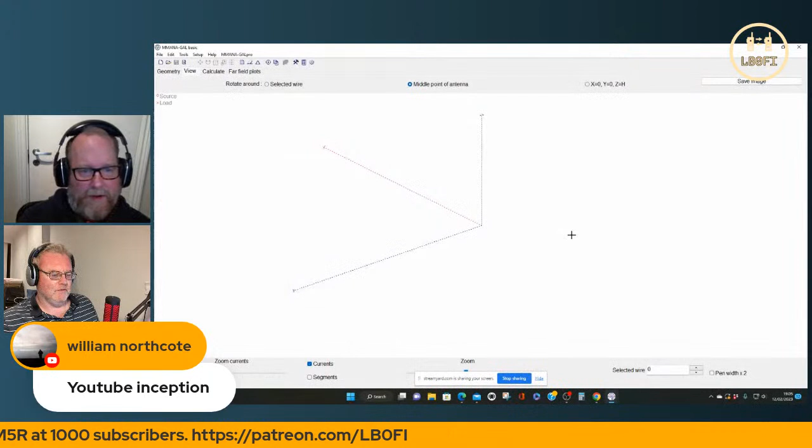Now, what can you see? Now I can see the two of us there, I think. We're good now. Right, we're getting there. Right, let's go. I think we're pretty much. There we are.

We're pretty much at the right place now. Good stuff. So let's say I wanted to draw a very simple vertical.

We'll do a dipole actually. So with MMANA, when you open it up, you get to this tab, and you've got lots of stuff. But let's say we just wanted to draw and go for it and just see what happens.

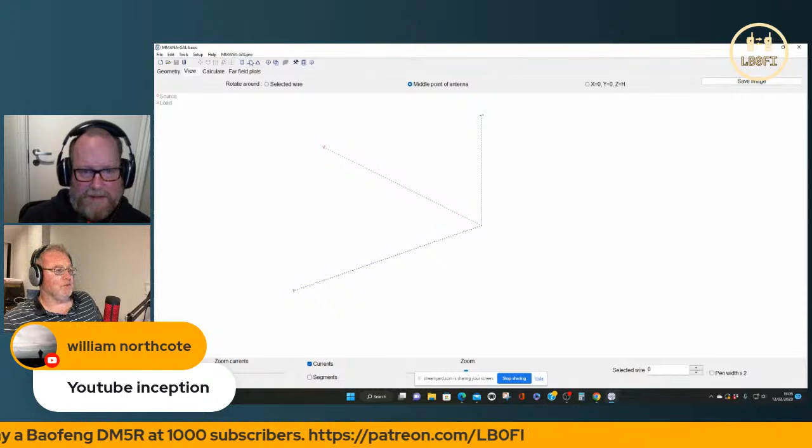So if I go to the top here, you've got the wire edit button, towards the top here. When you click on that, you go to YZ, and then what you've got is like a blue thing, Z-axis and Y-axis. In effect, that's how your system will be set up.

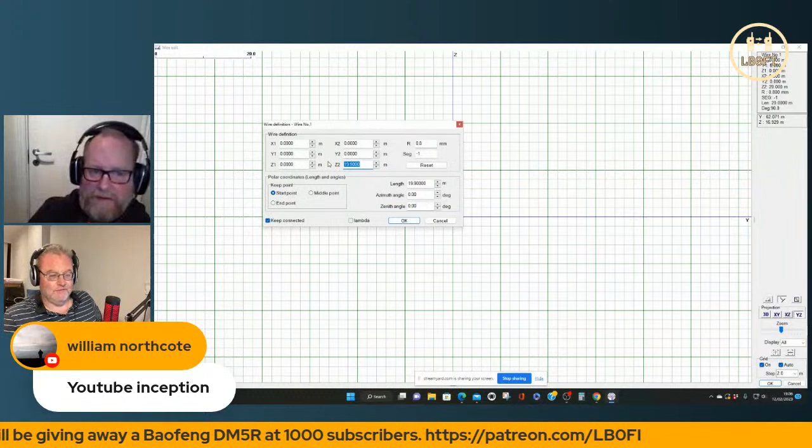So if I go and click on the pen here, and then literally just draw - let's do a vertical actually, start with the vertical. Now, that vertical is 20 meters long. So we're going to change that, let's go to 5 meters long.

Yeah, so we've now got a 5 meter long vertical. That's all we've done so far. Very simple, just drawn a little line in the middle there. And when you click on OK, this is what you've got.

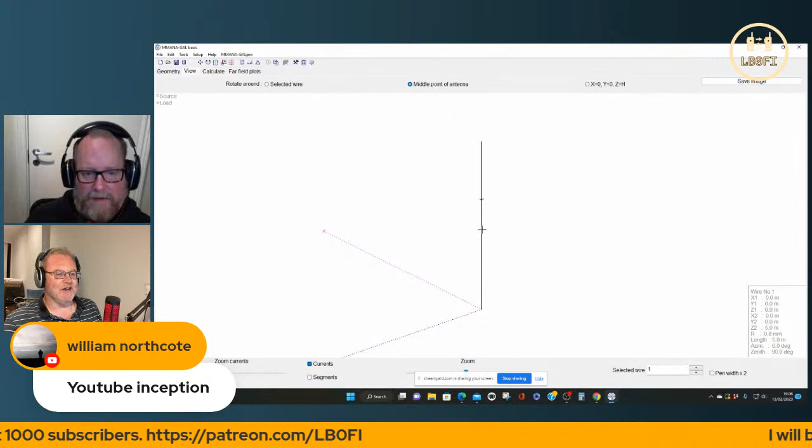Now, the one thing this antenna hasn't got at the moment is a source. The source is where you feed the antenna. Let's say, for example, you wanted to feed it at the end, like an end fed vertical with ground radials.

So if I right click on that, move and add source to - I always get this bit wrong, I think it's the end of the wire. No, it's the beginning. I always get this wrong. Move and add source to the beginning of the wire.

And what we've then got, you can see, is a little white dot at the bottom. And that is basically where you're feeding the antenna.

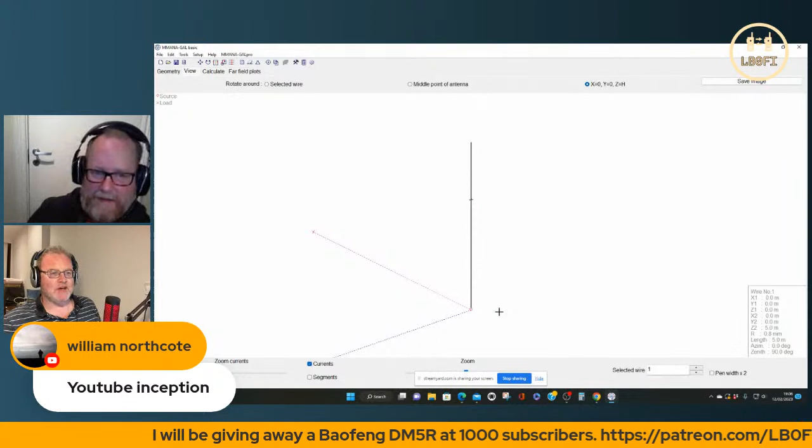So what we've got now is a quarter wave for 20, a vertical, right? Yeah, or a half wave for 10. Doesn't matter how you want to do it, it could be either of those things.

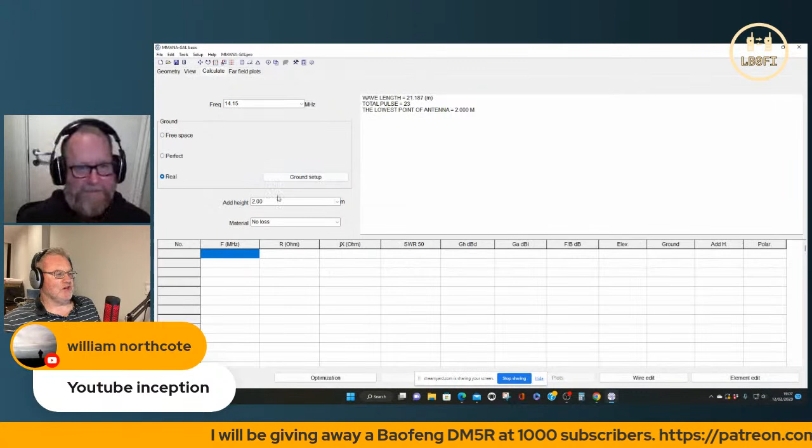Now, if you go up here to calculate, we'll change a few things. For example, we're going to say that the antenna is on the ground, so the lowest point of the antenna is at 0 meters. It's ground-mounted, and we'll use real ground.

So we incorporate a little bit of loss. And let's just say the material we're using is just copper wire. And let's have a look at it on 14 megahertz.

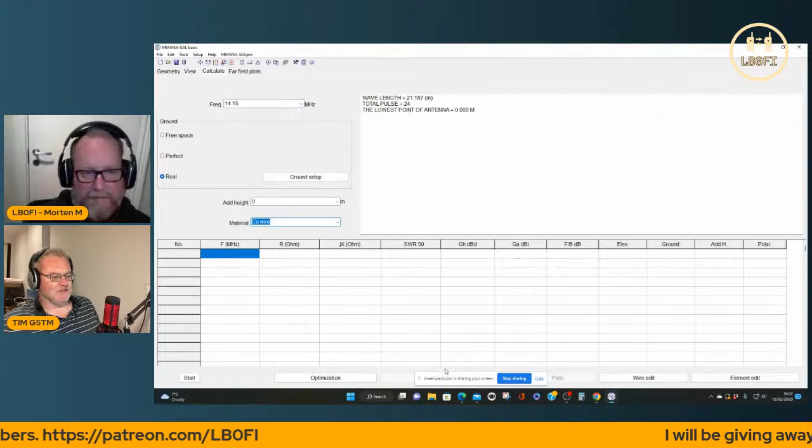Now, if we go to start, we can adjust the length for SWR. I get 1.9 to 1 SWR, which is kind of okay, isn't it? It's still usable.

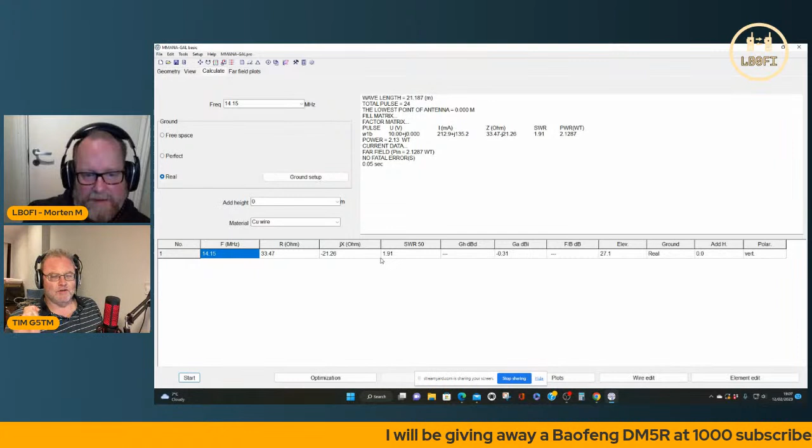It's pretty usable, but I tend to look at these more to do less with the SWR, because SWR can be adjusted. The big thing I look at is what's called the far field plot. And this gives us an idea about how this antenna is going to perform, in terms of it perhaps shooting its RF at different angles.

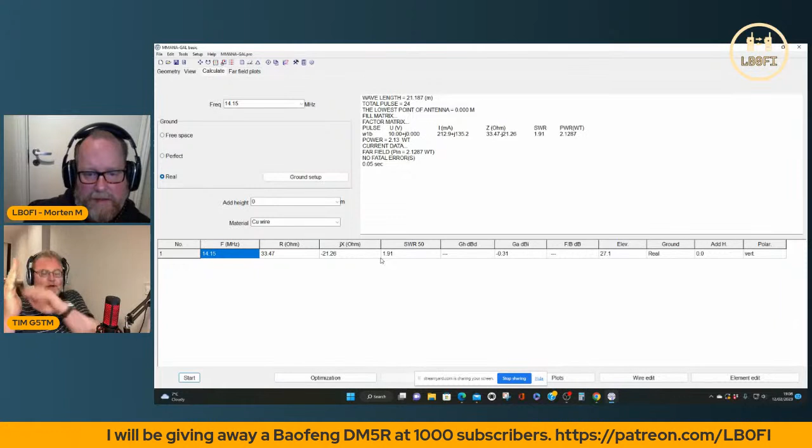So for DX, for example, we're looking at fairly low angles of radiation - we want our RF to come off at a low angle. Around 3 to 8 degrees is ideal, isn't it? That's right, yeah.

And I tend to use what Callum does - I tend to use 5 degrees as a baseline sort of thing.

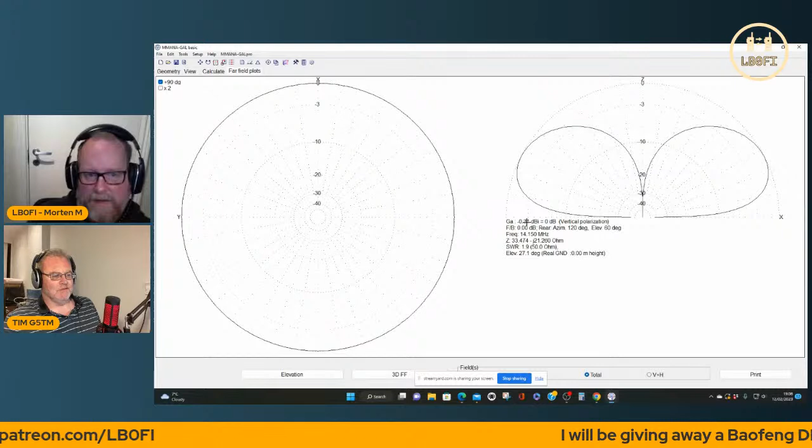So what we do, if we go up to the top here, we've got the far field plot. Now you can see this is what we're presented with so far, and it looks like a typical quarter wave. And we can measure - there's 2 ways we can do this.

We can measure basically what sort of performance this gives us at that angle. So if we click down here to elevation, we can change that to 5 degrees, which is, as I say, that sort of angle.

Being a vertical, of course, it's going to be omnidirectional. Now, as we'll see later, a dipole is different. But with a vertical, if you go around at the top of the screen, you've got a figure in dBi. This figure up here is going to be minus 6.9, literally all the way around. So basically, this is telling us at different angles, the antenna's in the middle, and right around the antenna.

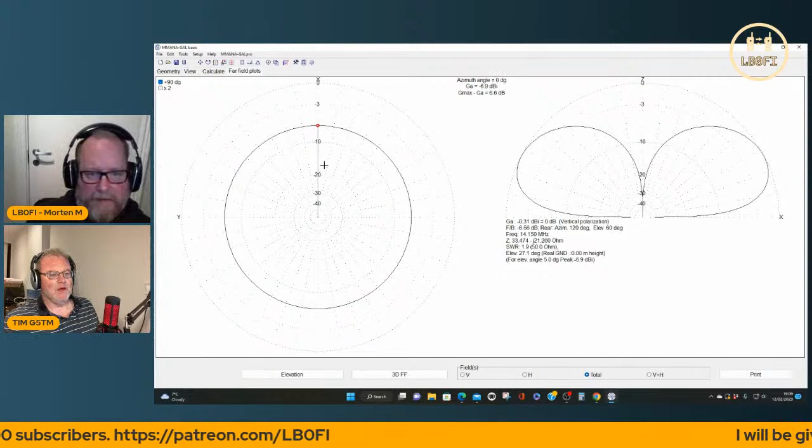We're hitting minus 6.9. Now, over here, this gives us a slice of the RF right in the middle, on the right-hand diagram. We can see, for example, that if we move it up and down, at 175 degrees, that's 5 degrees off the horizon, minus 6.9. As we move this up, we can see what the gain is at different angles. That's how it's working for us there as a vertical.

Now, if we can add more radials to this, we can make it higher and produce like a ground plane vertical and draw some radials off that. That'll probably increase our gain a little bit more. But as a bare vertical, ground-mounted quarter wave, it gives us about minus 6 dB, say.

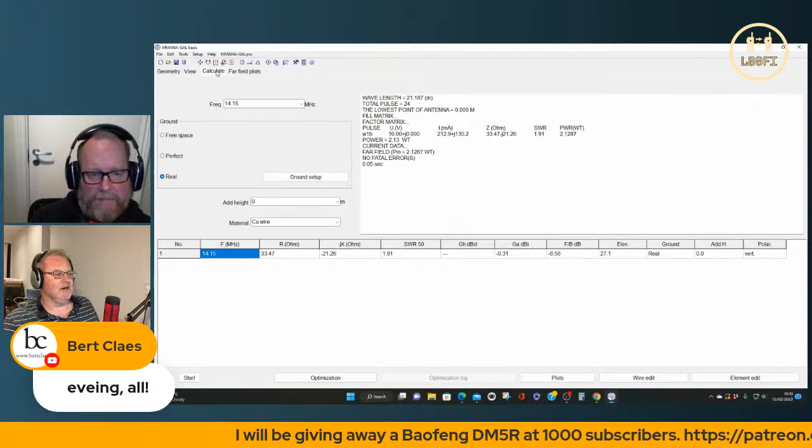Let's say, though, we wanted to run a half wave instead. So if we go back into the calculate field, we can adjust this to 28.5, because it's going to be a half wave there now. When we click on start at the bottom, you can see our SWR has gone up quite a lot. If you think about it, when you have a 49-to-1 transformer, this will bring our SWR down to somewhere around where our quarter wave was.

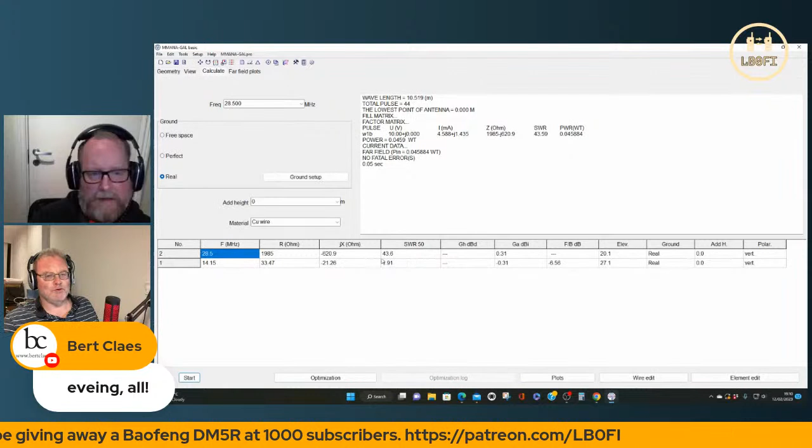But if you go to the far field, and if we click on 5 degrees, which is what our baseline takeoff is, we're now at minus 5.1. So as a ground-mounted half wave, it tends to perform just a little bit better than a quarter wave, maybe a dB and a half better.

That is interesting, though, because most people think about a quarter wave as the ideal vertical. Well, a quarter wave is very adaptable, but of course, with a half wave, you tend not to need the ground system you need with a quarter wave. You'll still get some return current coming back, but it won't be as much. The impedance is so high at that feed point that a lot of the current doesn't come back.

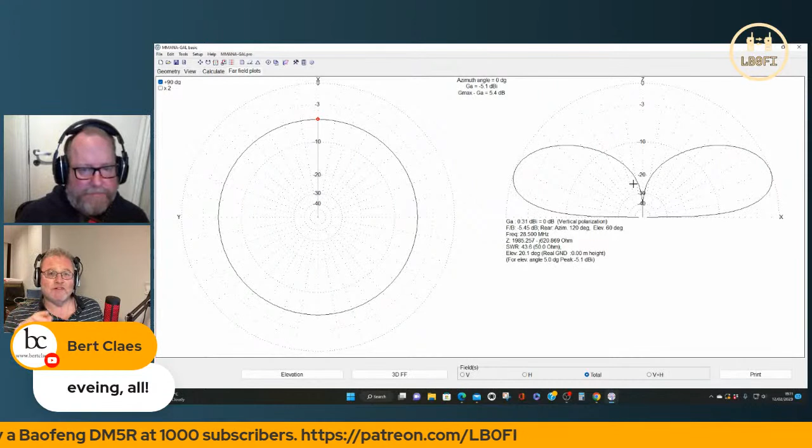So you don't need to have that sort of screen on the ground in terms of radials that you would need probably with a quarter wave, because don't forget that the feed point of a quarter wave, the current there is current fed. It's a current fed antenna. With an end-fed half wave, it's voltage fed. So with a current fed antenna, you're going to need to have that sort of screen of radials underneath to act as the other half of the antenna.

With a half wave, a bit less so. Nothing wrong with running a couple of counterpoise wires if you want to, but bottom line is, as long as you can perhaps put an RF choke on the coax, say 2 or 3 meters from the feed point, 6 to 9 feet, then you'll probably get away with it, no problems at all with a half wave. On 100 watts, I've never had a problem with RF or anything like that with an end-fed half wave, personally.

So we get a little bit of gain there. That's a ground mounted. Now, not many people would run an end-fed half wave as a ground mounted antenna. Lots of people tend to put them up a little bit. So let's go back and say we increase the height up a little bit, let's put another, even just a couple of meters on there. So let's say I'm using a 7-meter fiberglass pole, and again, ignore the SWR, it goes nuts with MMANA for some reason.

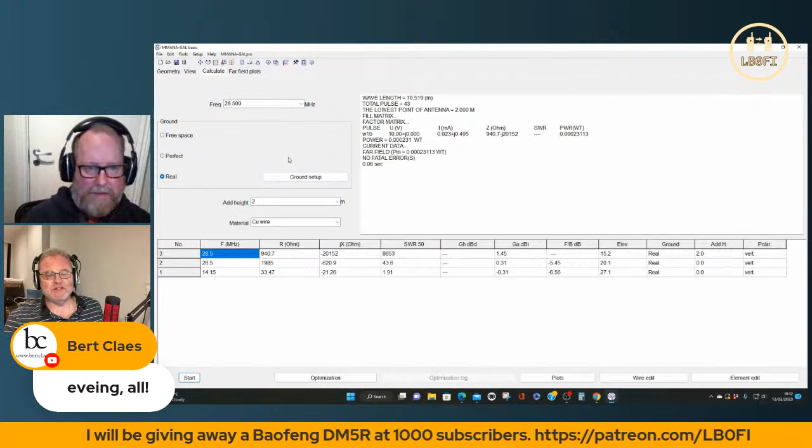But let's say I'm using a 7-meter fiberglass pole, and I'm running a 5-meter long half wave on 10 meters, which is what it would be. So the feed now is about 2 meters off the ground, hence the 2 there. Now, if we go to far field, you can see now we've got a slightly different pattern.

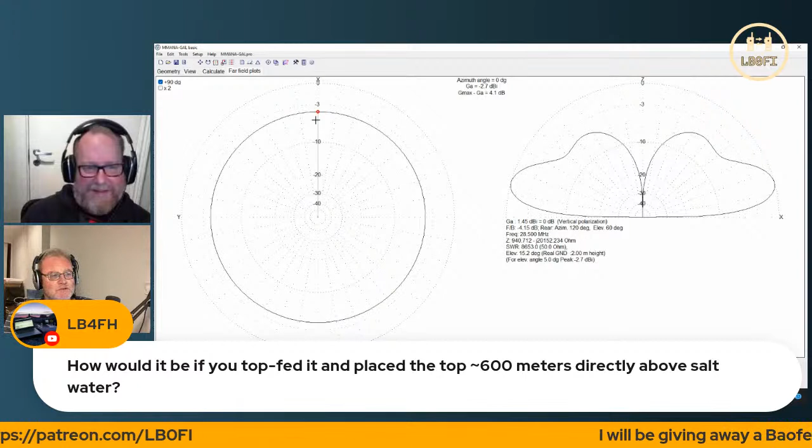If we go to 5 degrees, remember we had minus 5.1 on the ground, it's now minus 2.7. So literally by increasing the height by 2 meters, we've gained almost 2.5 dB. That can be with any end-fed half wave for 10 meters, about a quarter wave off the ground. If you're doing this for 20 meters, you need about a quarter wave off the ground, which is a challenge. But for the higher bands, if you can get just under a quarter wave off the ground, suddenly you're producing a fairly decent result, at minus 2.7.

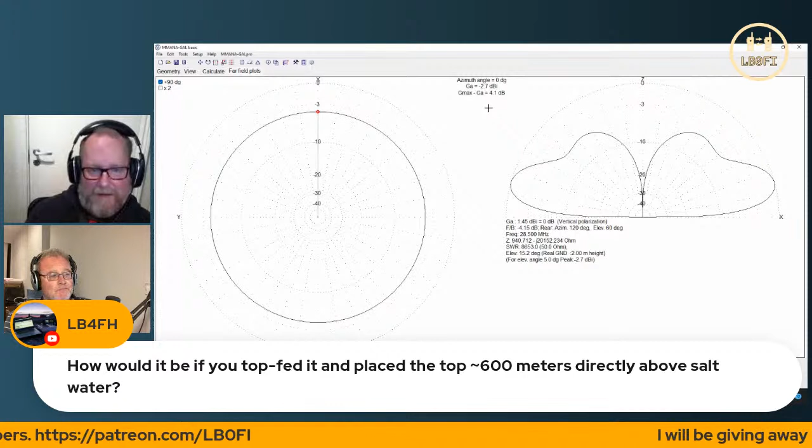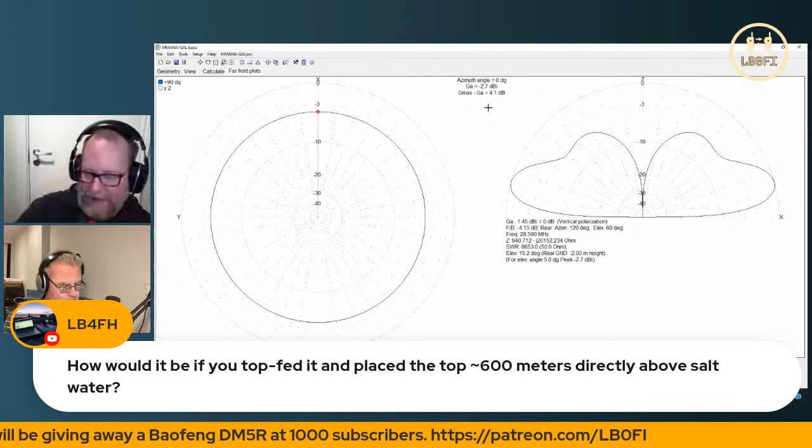I got a question here from LB4FH Kjetil, and I got a feeling this is somewhat rooted in real life. He asked how it would be if you top-fed it and placed it about 600 meters directly above salt water.

So if you top-fed it, we can model that, so it actually goes down from the feed. 600 feet, I mean, it's going to do very well indeed. 600 meters - actually he talked about that. He was doing an expedition, a SOTA expedition in Norway at the Pulpit Rock in southwestern Norway, and there's a cliff going down 600 meters to salt water.

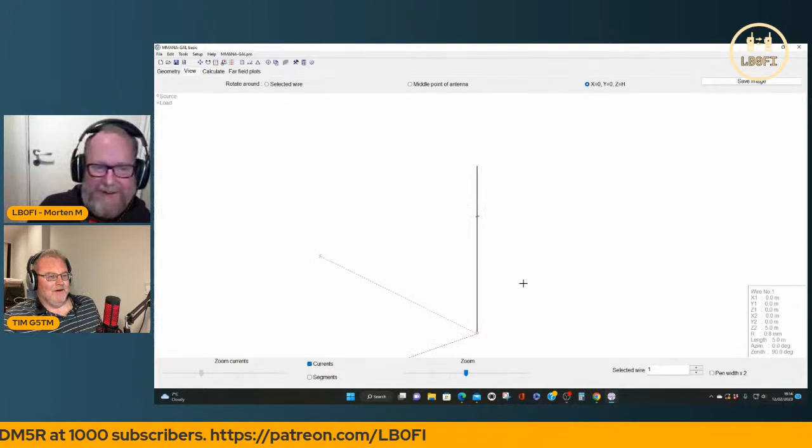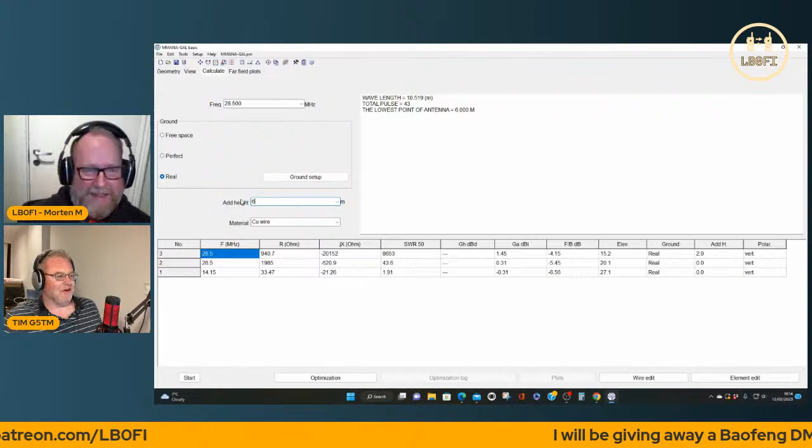So let's have a look at that for a laugh. We'll move the source. Let's just do it, go to the end. I don't think it matters too much, and we've got to calculate. So we'll stick it as a half wave on 28 megs. Well, adding height, 600 meters? This will be fun, let's have a look. 600 meters, okay then, let's have a bit of fun. Let's have a look at the far field. Oh wow, look at that.

Now, 5 degrees off the horizon - minus 4. You'd be worse, work that out. That seems mad to me because it's so high. It's so far above a full wave the pattern tends to do mad things, doesn't it? Exactly, so that's interesting though, isn't it? We've answered this question now.

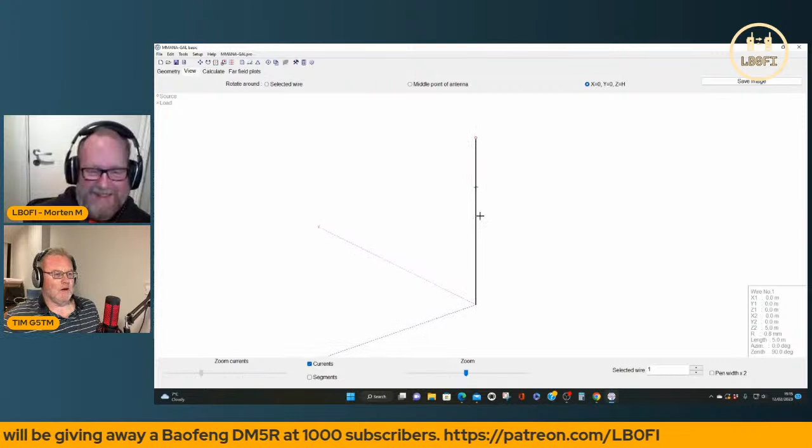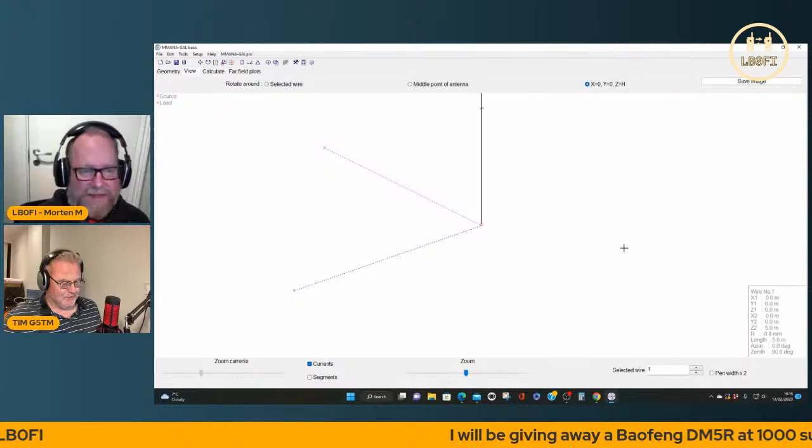Okay, so we've got a couple of questions coming up. Can a doublet with ladder line be modelled? It was horrible to operate there. Yeah, there we are, we've confirmed - can a doublet with ladder line be modelled? Yeah, the answer is yes, it can be. Bear with me, let me show you what I've done, if you don't mind, I can have a look at one.

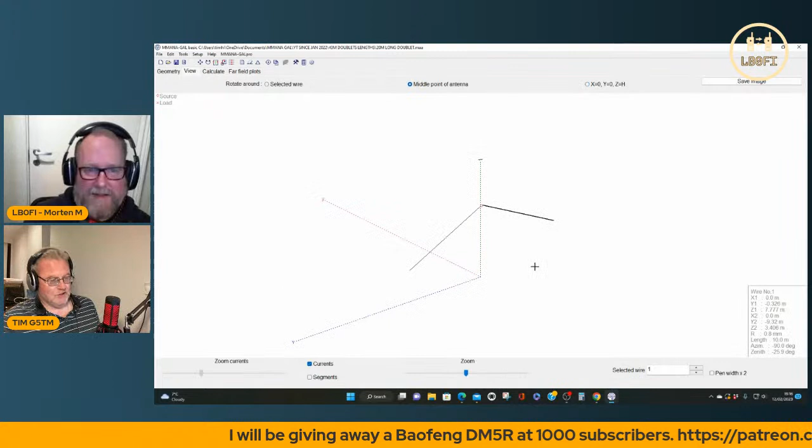Let's go into my files - 40-meter doublet lengths, and we'll go into... no, are they the 20-meter long ones? Just bear with me. Okay, so if we open that up, alright, so if you can see, hopefully you can see that - what we've got here is an inverted V doublet.

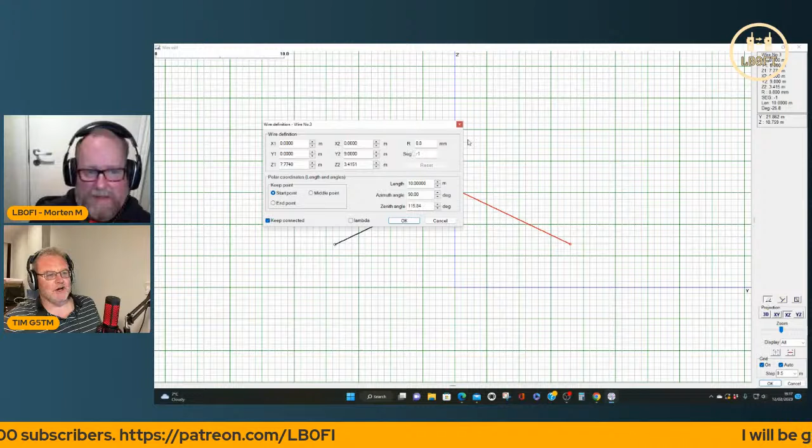So if I go into here, where are we, the ends are - let's have a look, where are we with this? Okay, this is typical - in the UK and lots of countries I suppose with small back gardens, we try and do our best using pretty low doublets and dipoles, don't we? So this dipole, for example, if you look on this left-hand little box here, it's about 7.75 meters above ground, that's about 24, 25 feet at the top. And then the legs go down to about 10 feet off the ground, that's about 3.5 meters, probably a bit more, maybe 11 feet or something.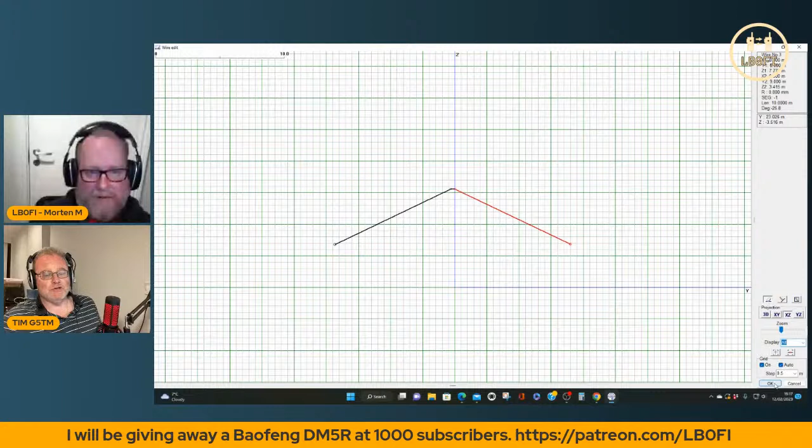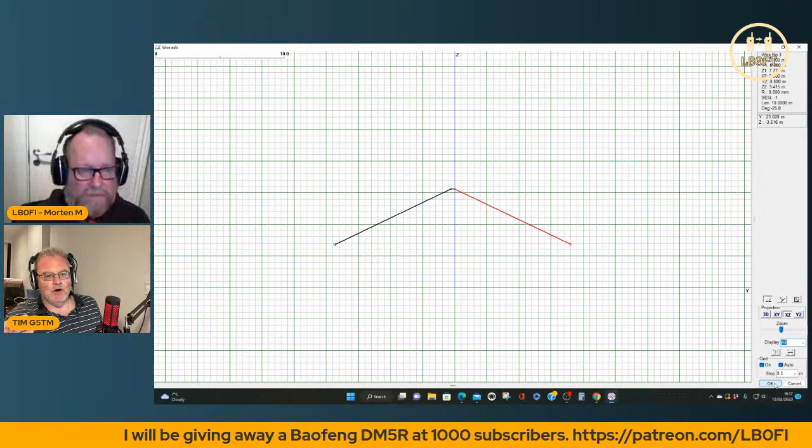So that's how I drew that particular dipole there. Now, what I was able to do - first of all, there's two things you can do with a sort of model. First thing is to work out the patterns, if you like, on different bands. The second thing I was able to do, which I think relates more to the question, is you're able to have a look at the feed line and get an idea of things like likely losses on that feed line, which is a different thing I can show you.

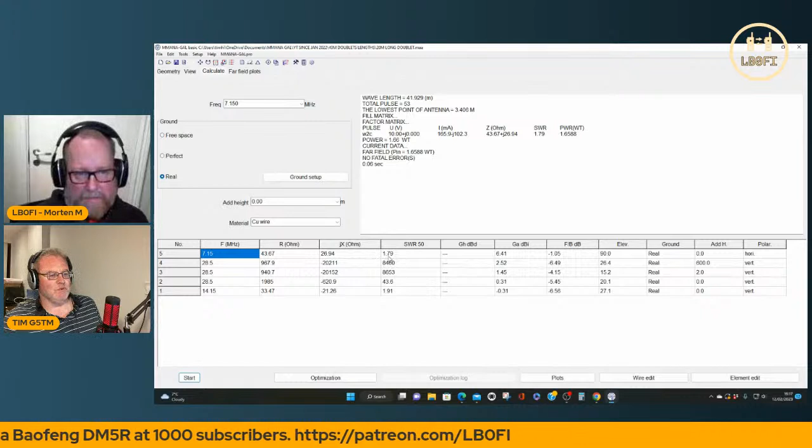So if we have a look at this particular example here, we're going to go to 7 megahertz and just start this up. Yeah, you can see it's pretty good on 7 megs, it's 1.79 to 1. It's a 20-meter long dipole, so it's effectively going to be okay for 7 megahertz as a sort of half wave.

Now, if we try to look at this as a DX antenna, we're going to be disappointed in many respects, because the thing is barely a quarter wave above ground, less than that, barely an 1/8 wave above ground in total. So we can see how small a little circle goes on. It's minus 11.4. But having said that, it's still only 6 dB down on a vertical.

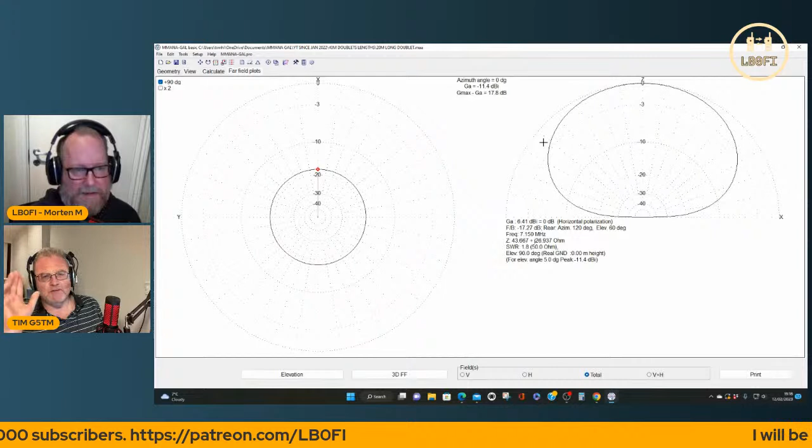So, for example, I've got an even more compromised antenna than this for 40 meters. It's a dipole, fed in the middle with RG174. It comes down, it's bent around, and it's a real compromised antenna. It's on a fiberglass pole, which I've Araldited the sections together, so it's permanently stuck together. But if you get on the air at the right time, I went on the air at about 6 o'clock in the morning.

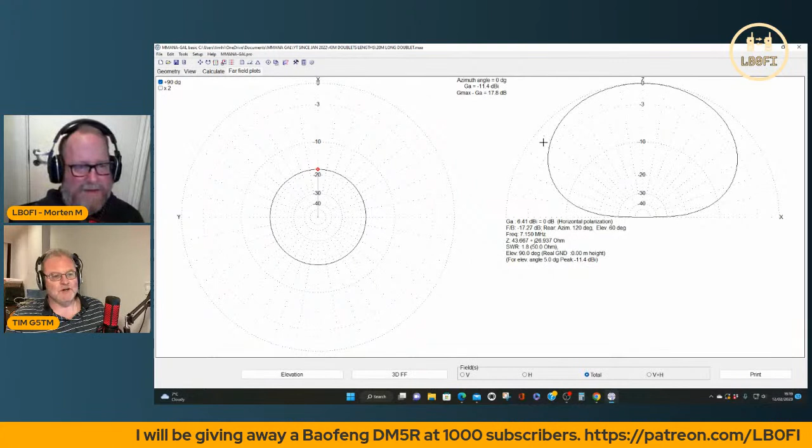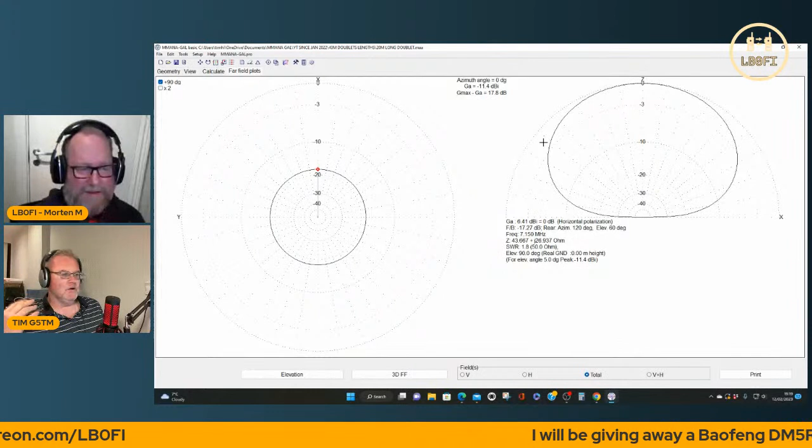I just got up early one weekend and went on the cluster, which isn't always a great thing to do, I know. But I realized there were some stations working European stations from the Caribbean and North America, and I thought I'll just jump on and have a listen. Because the noise floor was much lower at that time of the morning, because people weren't on their devices at 6 o'clock on a Sunday, and a lot of other stations were still in bed, I was able to work these guys.

I probably wasn't very strong to them. But if you time it okay, you can work DX on a compromised antenna like this. It will work. You will work DX with it. But if we look at this antenna, it's what we call a cloud warmer, isn't it? It's going to be really nice for about 500 miles or so, about 800 kilometers. It's going to do you a nice job.

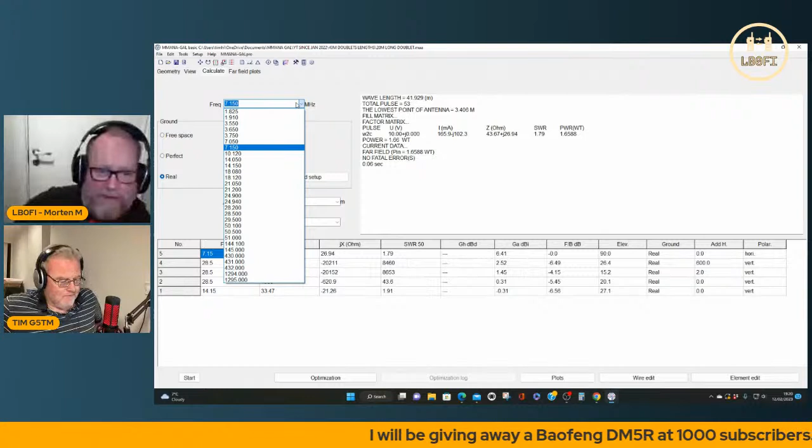Within the UK, we have something called inter-G propagation, which is basically within a couple of hundred miles. It's much more prevalent now because of the high sunspots. It tends to give us a lot more to play with, short skip on 40 meters. So it works well for that. I noticed that you guys use 40 meters a lot in Britain with each other, because it's just a short skip over to me, so I pretty much hear all of it. Yeah. Whereas I would actually have figured it's a little bit too close for 40 meters.

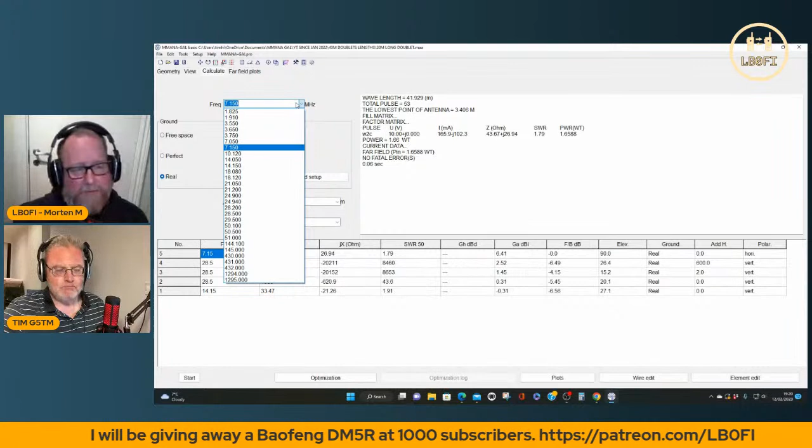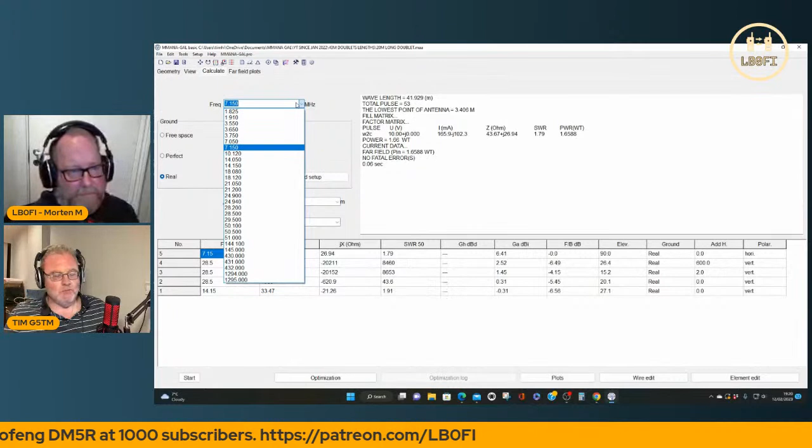Right. Great for you. But Norway's one of those countries where we do quite well. Norway, Finland, Sweden, the Scandinavian countries are only a bit further on than Germany. Denmark, of course, is right across the border from Germany. So we tend to do pretty well in that area. If the skip goes a little bit longer, we tend to hear Scandinavia pretty well on 40 meters. So late afternoon is a good time for that.

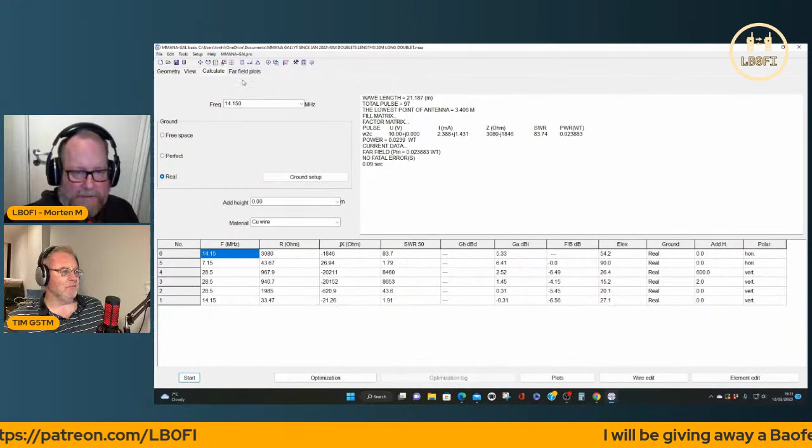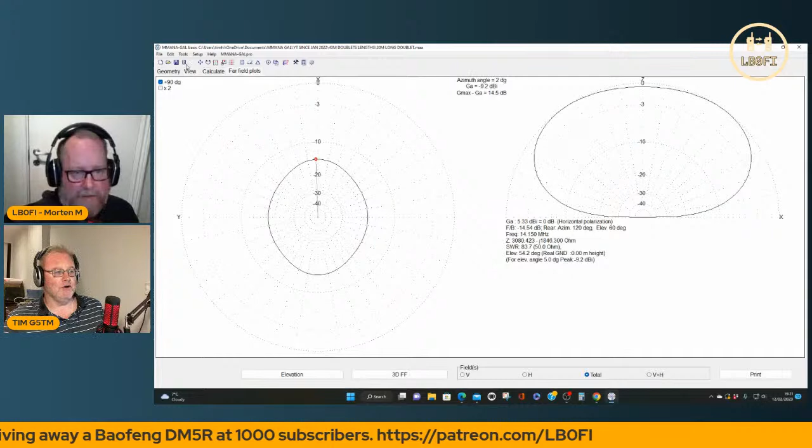So let's say we're using the same antenna, now feeding it with ladder line to try and make it a multi-band antenna. Let's check it out on 20 meters, 14.15. Now, the SWR we can largely ignore, as we'll see in a minute. But if you look at the far field plot, because it's still relatively low, it's gone a bit mad: we've got minus 9.2, minus 12. Again, not great on 20 meters.

But if we look at it on 10, where it's a little bit higher as a fraction of a wavelength above the ground, that's a bit of a mad plot there. If we go to 5 degrees, you can see we've got these lobes developing and these nulls, because basically the antenna is going right across from Y. So you've got some lobes and nulls. For example, here minus 2.8, which is actually better than a vertical. But then we've got these nulls right in, minus 12.

So the antenna wouldn't be a disaster on 10 meters, and probably on 12 and 15. But the lower down we go in frequency, because it's lower to the ground as a fraction of a wavelength, the more it'll be a bit of a cloud warmer, really. But you do what you can do, don't you? That's just how it goes. Exactly.

Indeed. And I got a little bit of some technical issues here. Okay. I don't know what has happened with the stream. I can see your comments. I'm not able to put them up on screen for some reason. You seem to have disappeared. Okay, no problem. Well, you're still with me, folks, and hope you're all okay there. I'm sure Morten will try to be back with us in a moment. I can't see the comments at the moment, guys, so do bear with me. Oh, he's back. Hang on. He's trying to get back with us. So we lost Morten. Yeah, Jeff, we did. Hi, Morten. I'm back now. Let's see if things start working here now. So that's good.

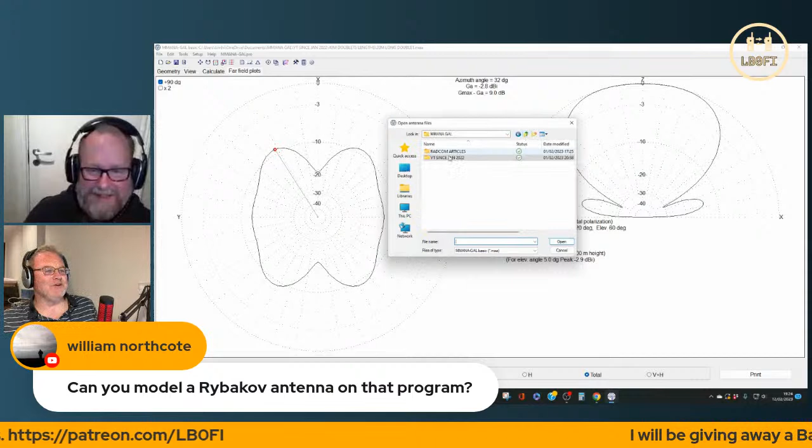I tell you what we can do. Go on. William Northcote here, asking if we could model a Rybakov. Oh, well, it's funny you should say that. Yeah, Walt and his Rybakov. He loves his Rybakovs, doesn't he? He's done, and there's a couple of guys trying them out now. They do work really, really well. Let's do that. So yeah, I got one myself, and I can't get it to work for anything. Mine is a really poor antenna. I see a lot of people talk really great about them, but I can't get it. You've not had any success? No, not at all. Well, let's have a look.

So a Rybakov's about 7.8 meters long, I think. 7.6. Let's go 7.6. We're not looking so much here in terms of the ground or anything. We're just having a look at the far field with this. 7.6 meters long. Let's go up to 10 meters first of all. Hang on a second, I haven't done that right. And I've got to add a source, haven't I? Beginning of the wire. There we go. Right, so let's try it on 10 meters.

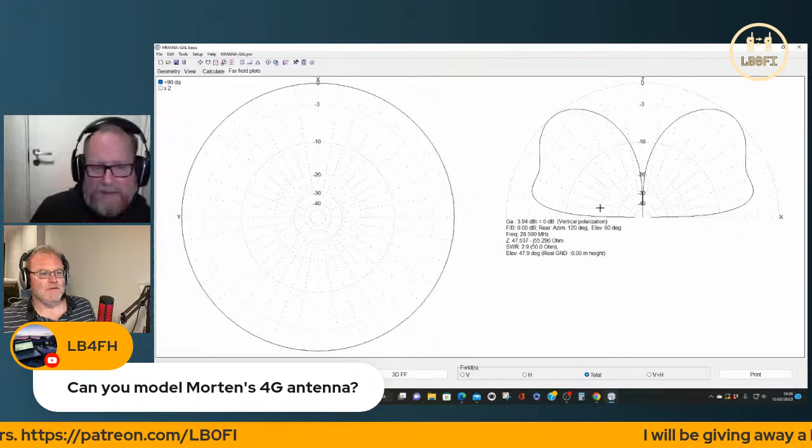Now, on 10 meters, don't worry so much about the SWR. It's actually about a 3/4 wave on 10 meters. If you look at the far field, this is about a 3/4 wave pattern. The first thing you think is, oh, crikey, that looks a bit mad because you've got these really high lobes up here, and there's not much happening down here, if you're looking for DX, for example. But actually, that's a bit of an optical illusion. Sorry, hang on, it's gone a bit mad.

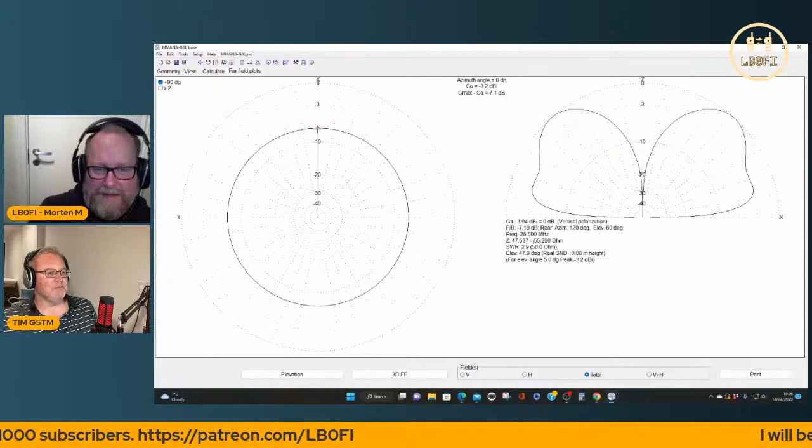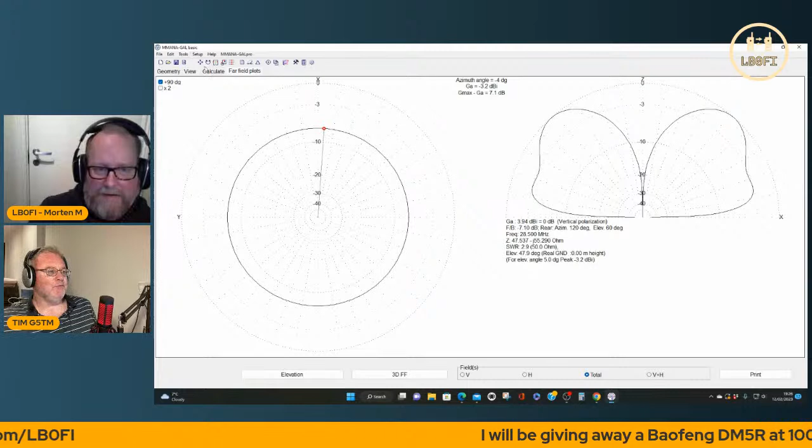Right. So if we then change that to 5 degrees, remember our ground-mounted vertical is about -6. Our end-fed half wave, a couple of meters above the ground, is about -2.7. Well, this is -3.2. It's actually a decent little performer. So technically, as a 3/4 wave, you get a nice gain. It's just that you've got these really high lobes up here, but down here it's -3.2. It does a good job. If we try it on 12 meters, I think on 12 is actually... Go on, sorry. Go ahead, 12 first. Say again, Morten?

Yeah, just go ahead and show 12 first, and I'll ask my questions after. Okay, mate. I'll do 12 meters, and we can see 12 meters at -2.4. Because on 12 meters, 7.5, it's something like about 5/8, I think, on 12. That's a nice looking pattern. So on the high bands, it does well.

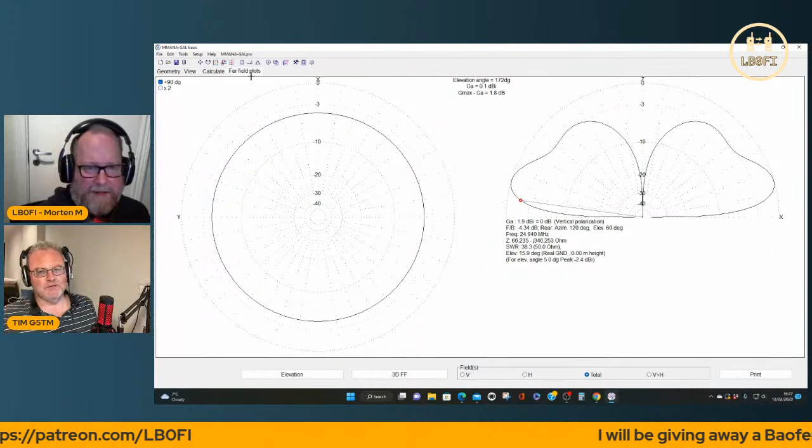The key to a Rybakov, and we'll look at some if we take some questions in a second. The key with the Rybakov is you've got to make sure that, first of all, you've got a decent ground. So running a single counterpoise is okay, but if you can put down maybe a bunch of radials, that will help a lot more. The other thing as well, because it's non-resonant, you do want to try, if you can, and put the tuner as close as you can to the feed point.

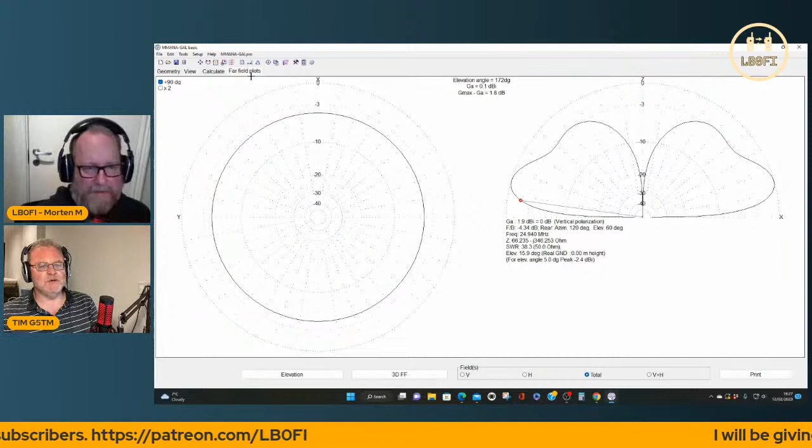It's the same with the 43-foot verticals a lot of the guys, especially in the States, use for 80 meters through 10. You've got to make sure you've got the tuner at a point where it's not too far from the feed point, rather than relying on lossy coax before you get into the tuner in your shack. So even if you're running this portable, which a lot of guys I think do, you want to make sure you don't have a run of more than, say, 15 to 20 feet of coax if you can get away with it.

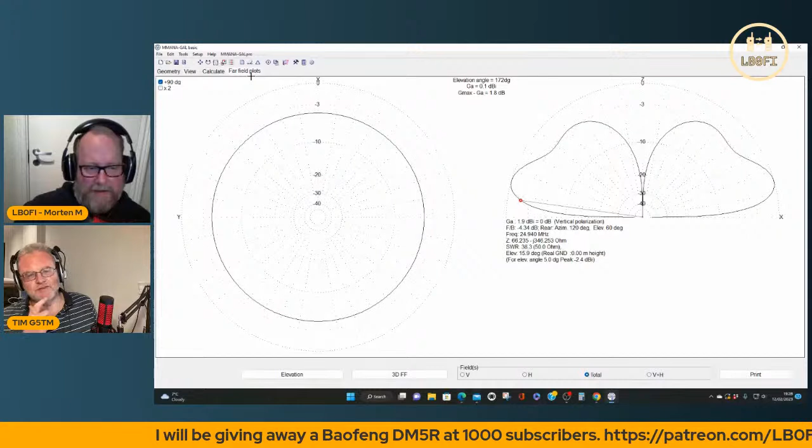I do use this now and again at home. It's a slightly shorter version in all fairness, but any non-resonant antenna, if you can have the tuner as close as you can to the feed point to negate those coax feed line losses, that would be good because it'll sing a lot more. But it's a nice antenna on those higher bands for sure, yeah.

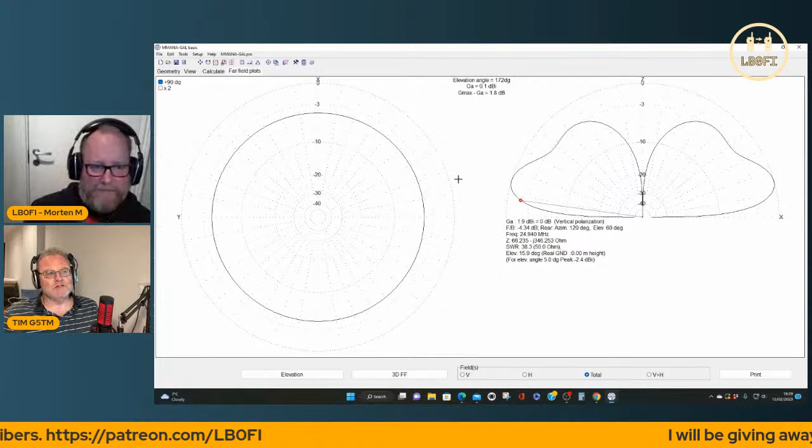Yeah, and I've seen you on your videos use your tuner on the roof of your car when going out mobile. Do you notice any kind of performance improvement compared to having the tuner inside the car? I need to do more testing. There's no doubt there is a performance difference. There has to be. I think I'd probably use about 4 to 5 meters of feed line with the tuner in the car. So there would be, I think, an improvement there.

In fact, let's have a look. There's another little program I use called Transmission Line Details, which is a nice, simple little program, which will actually allow you to... Yeah, go on. Yeah, I just have one question before we let the Rybakov go, though.

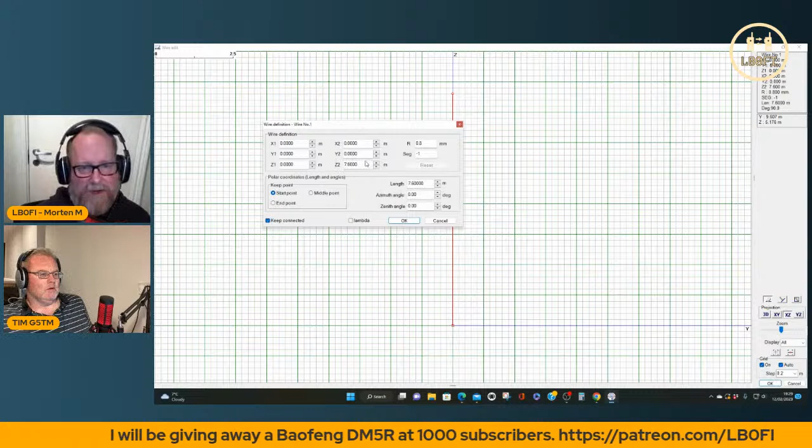If you make the Rybakov a sloper, how would that perform? Ooh, right. Let's say, because most amateurs in Norway use a 6-meter mast, if you make it a sloper on a 6-meter mast, you can put the high point about 5 meters above ground. Sure. Let's try that. So, what do you mean? The high point 5 meters above ground, then slope it down to the ground. Got you.

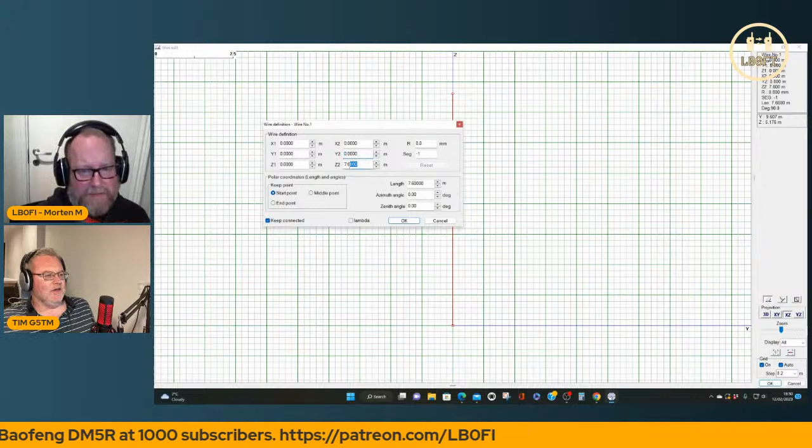Okay. Right. So if we say that that's going to be at 5 meters. Okay, so where are we? Let's see if we can move this across to here. And where's our height here? Is that 5 meters? Okay, it wants to be a bit longer, doesn't it? 7.6, we said, wasn't it? Length. Yeah. Where's that height? We need a bit more of a slope on this then, don't we? So let's go like this.

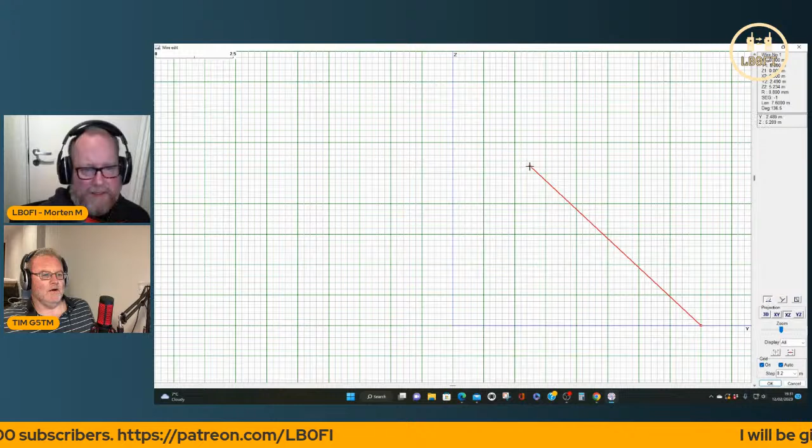What's the length? The length's going to be too much, actually. 7.6. Hang on. And how high is that going to be? Well, it's about 5 point. Let's have a look at this. It's just about 5.2 meters. So it's going to be 5.2 meters above ground. Yeah, that's close enough. So let's have a look. Let's try that again. Let's go to 10 meters.

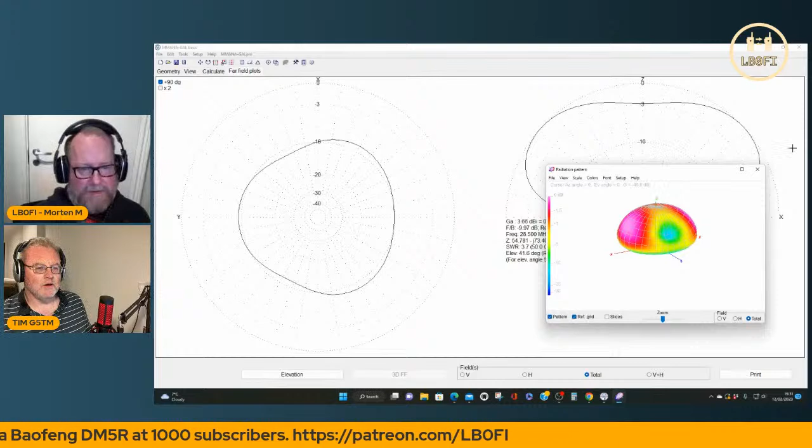You see, there we go. So, effectively, we've got a bit of a difference here, haven't we? If we've got to 5 degrees, if we go to 3D far field, we'll just make this a bit bigger. Now, where's our antenna? It's sloping there. So the antenna, the top of the antenna is up by the green bit up here, Z. Yep. And it's sloping down to here.

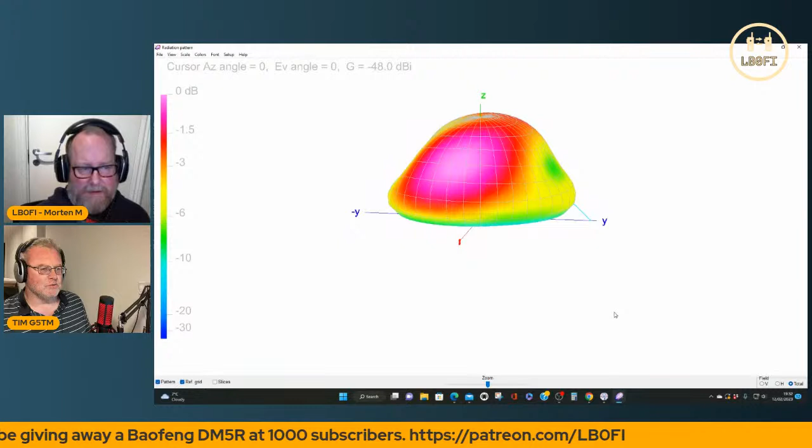So you can see that when we have high amounts of gain, it's in reds and pinks, and low amounts is in blue. So we have a greater degree of performance, if you like, coming off the slope. So if I just come out of there for a minute, if we go back to here, I'll move this across here a bit. There we go. So effectively, we have more RF being generated in the direction of the slope. So we do have a bit more of an advantage going in the direction of the slope, and a bit less going back the other way.

So if we go back to here again and recalculate that, and if we go to 5 degrees, we've got minus 11.2, minus 5.9. So effectively, in the direction of the slope, we're at minus 5.9. At the back of the slope, we're at minus 11.2. So there is about a 5 dB front to back in this situation. It doesn't look like it works as well as a sloper, to be perfectly honest with you. That probably explains my issue with the Rybakov, though. So I need to get a longer pole to make it work properly.

I have got an idea for a Rybakov, which I was hoping to do tomorrow, and I might not be able to. And the idea I've got is to use that same length of wire, say 7.5 meters, and have it mounted on the roof of the car. I'll just use a normal little mag mount, SO239. And then have one of these. Can you see that? Hang on. There we go. LDG 4-to-1 Unun, which I've recently just got. Most people use 4-to-1 Ununs with Rybakovs.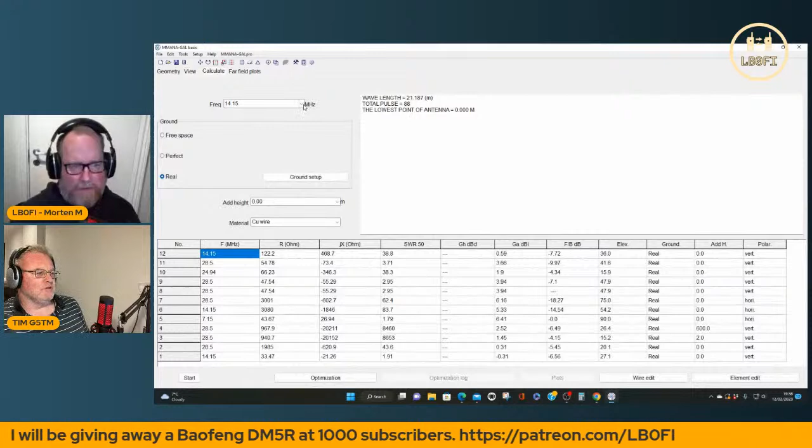Right, okay. So that's going to be up 10 meters. Let's just double check. Up 10 meters. That's 10 meters. Depends how much space this gentleman would have. But if we go up 10 and slope 10, let's have a look at 40 meters.

So we got a nice cloud warmer. It's probably going to be as good as any dipole of that height. The very top of it's only about a quarter wave above ground. It'll slope back down; I think the far end of the slope isn't quite at ground level. But that's kind of how a 40-meter dipole would look, and a 40-meter end-fed half wave like that. So it's a good cloud warmer, good for short stuff.

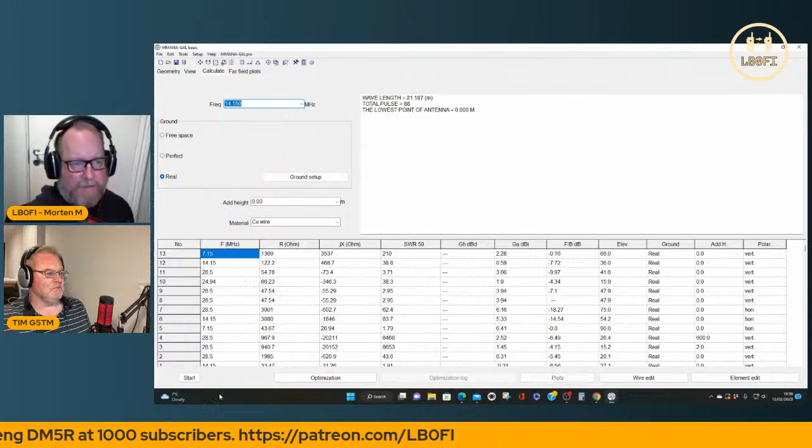I'm interested in the higher bands. 14.1, we'll try 20 meters. Let's try it at 5 degrees. Not bad. Minus 4.4, minus 5, minus 6, minus 7. Again, we've got a little bit more gain in the direction of the slope. But that's all right. It'll do okay.

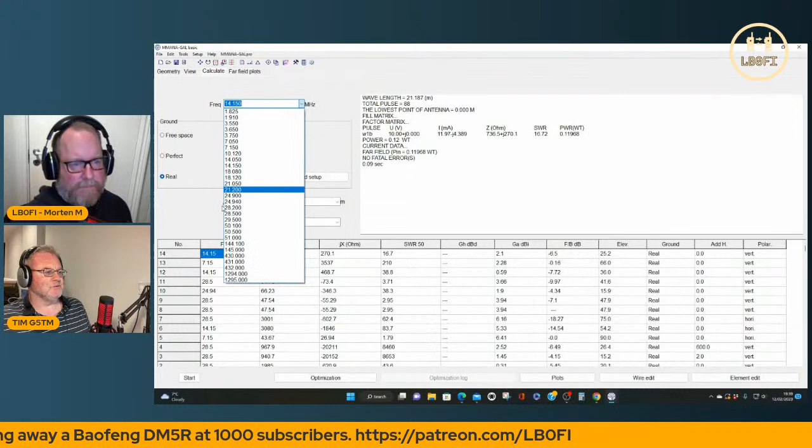It'll be 15 meters as well, won't it? So we have 40, 20, 15, and 10. Let's have a look at 15. Now we've got a more pronounced situation. You can see basically we've got all our gain coming off the direction of the slope. So we're minus 4.8. Very good. That's as good as a vertical, really. But once you get behind the slope, we're minus 13. So it's very much favoring the direction of the slope on 15 meters.

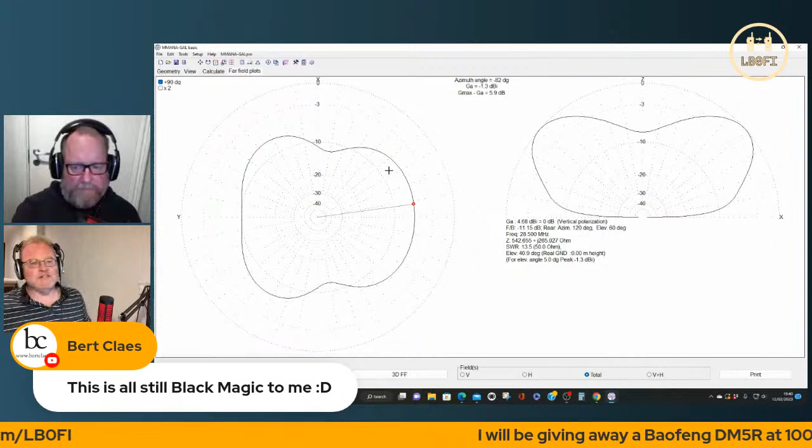And on 10, finally, let's have a look. Again, we'll try 5 degrees. Again, the slope is good. Towards it minus 1.3, that's decent. Bit of a null there. And even behind the slope, we're still at minus 5. It's actually quite a nice antenna on 15 and 10. You've got some nice gain with it. It's not bad at all.

And considering that the higher bands are opening up, this would be a good portable setup; just point it the way you'd like to go. I see Bert comments that this is still a little bit of black magic to him. It is.

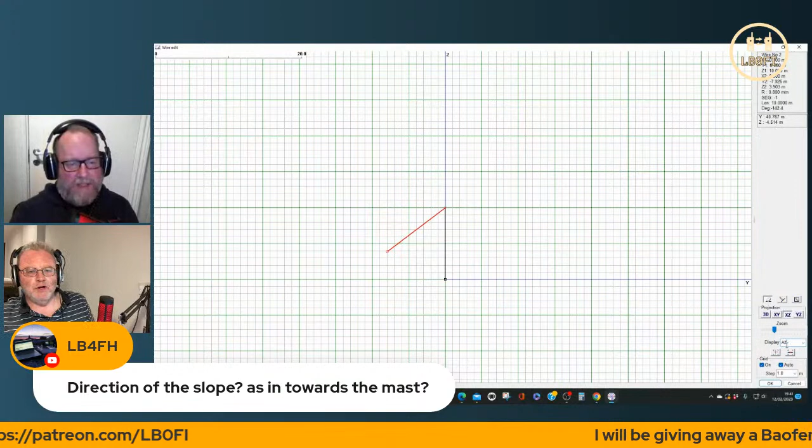A lot of it is. And I see LB4FH here asking about the direction of the slope, as in towards the mast. So if we look at this, this is your antenna, say. Let me just make that a bit better for you.

Hang on, there we go. So it's fed at the bottom. The red one I've highlighted there is fed at the bottom. So basically your slope is there. The majority of your gain will come off there, it'll shoot up from your sloper and go up towards that way where my cursor's going. Okay, that's where the majority of that gain will go.

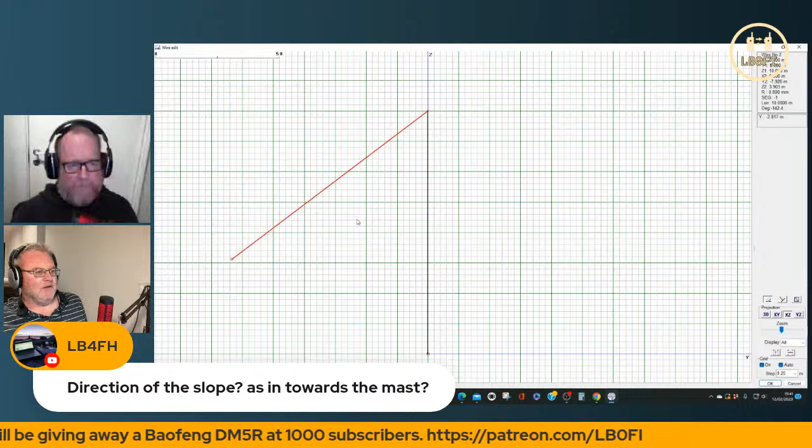So behind here is where you might get some null, especially on 15 meters. It seems to me you get a nice directionality up that way, but behind your mast, away from where the slope is, you'll get a bit of a null happening by the looks of it.

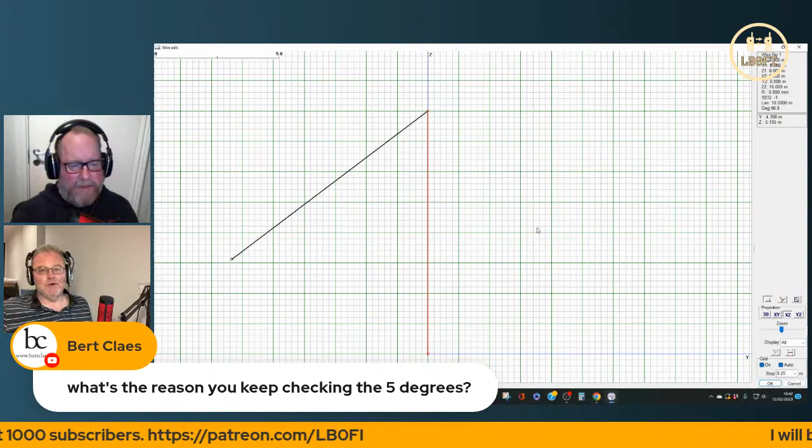So there we go, that's exactly it. And I see Bert asks here why we're checking off 5 degrees, and that's because that's where you get your DX. It's a baseline, you can check at 2, 10, whatever, but 5 is kind of an average figure, really. That's right, so there we are.

And I see LB4FH asked if you can make that null out certain QRM rich countries. I guess you could do that. I couldn't imagine which countries he means. I have no idea, of course.

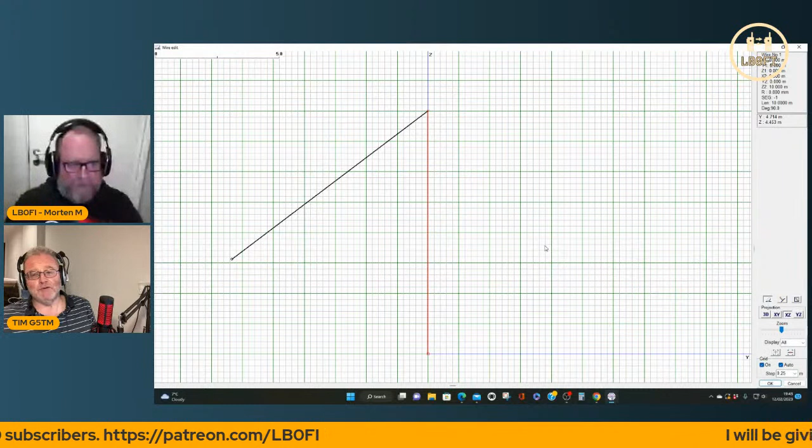It's a bit like an L-shaped dipole as well. We've got vertical dipoles fed in the middle, but if you run an L-shaped dipole, you'll get more gain in the direction of the L, and far less in the opposite way.

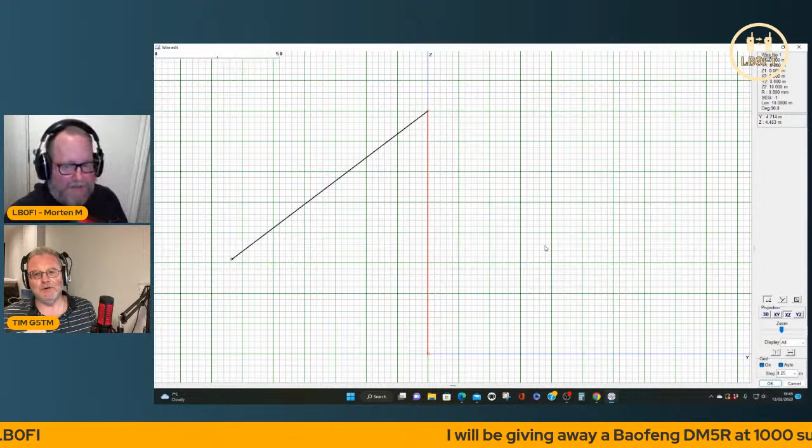So sometimes that's good, because sometimes you might have a neighbor you've got an issue with, maybe giving a bit of TVI or interference. If you run an L-shaped dipole, you can run the L away from their property and probably be a lot better, have less chance to interfere with their systems.

So there we go. Actually, this is really useful though, because this gives me some ideas for some antennas to try out now that the weather's getting warmer and the higher bands are warming up. Absolutely, and we're spoiled for choice with the higher bands, really, aren't we? We can put a dipole up, a straight vertical, a ground plane, a quarter wave. You don't need a lot of space, especially portable as well. So it's exactly really good fun.

And conditions have been great. I've been regularly having North America on Parks on the Air now for about a month or two with the hamstick operating mobile. Wow, is that 20 meters, Morten? Yeah, that's 20 meters. Brilliant. That's kind of the golden band for portable use though, because you'll always find some stations there.

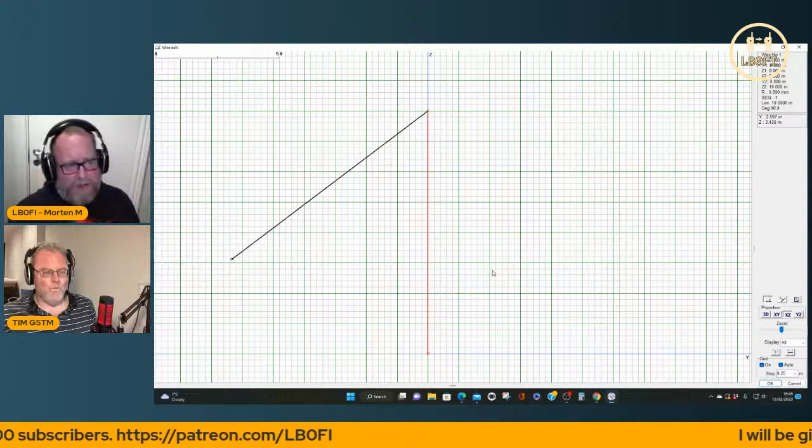Do they tend to be higher up on 20 meters, about 14.3 something? Is it that end they tend to congregate? I tend to activate on the higher end of the bands though. A couple of weeks ago, the first station that got back to my CQ after about 2 CQs was from West Virginia. Wow, with a hamstick on QRP. QRP, oh wow, that's really good.

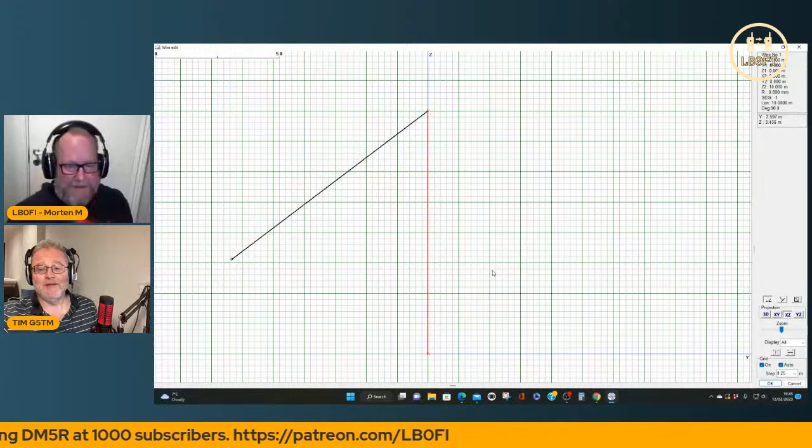Those hamsticks for the money, you can't beat them, can you? You just can't beat them for the money. Great antennas, far better than their reputation. Totally right. And if you get in a nice spot, right by the salt water somewhere, then they're about 30% efficient, really, on 20 meters. But you think that's terrible, actually a decent vertical is going to be probably 80% efficient, right?

You're not looking at much more than about an S point difference anyway. But if you put one of those 20-meter ham sticks right by the sea, then you aren't going to worry about anything, to be honest. You're going to be absolutely romping out.

Oh, is there anything else you'd like me to have a look at on here, Morten? Anything else? Don't know if the viewers have any questions here.

Yeah, but thank you, Tim. You probably got to go to another stream pretty soon. What time is that stream, by the way? 8:30. So listen, we'll finish whenever you want to, mate. That's absolutely fine.